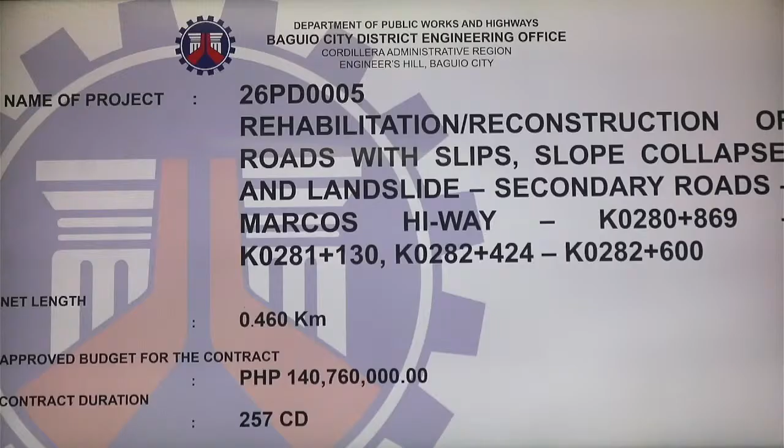Good morning, everyone. I am Engineer Jerome Murph from DPWH BCDEO, and I will be presenting the project 26PD0005, Rehabilitation, Reconstruction of Roads with Slips, Slope Collapse, and Landslide, Secondary Roads, Marcos Highway, from K0280+869 to K0281+130 as Site 1, and Site 2 will be K0282+424 to K0282+600. Net length of the project will be 460 meters or 0.460 kilometers. Contract duration will be 257 calendar days.

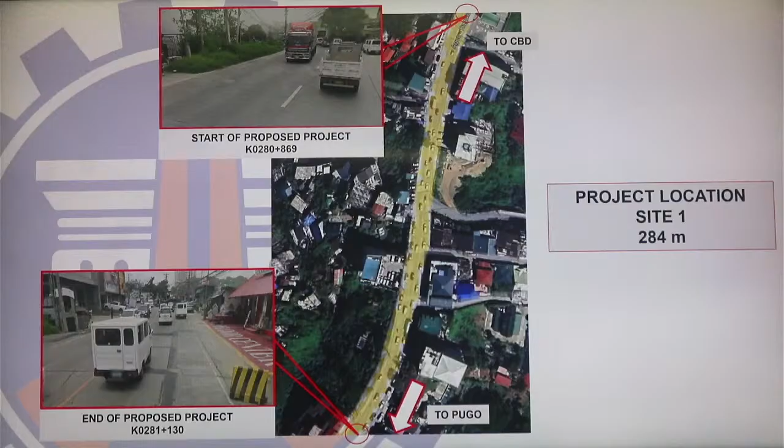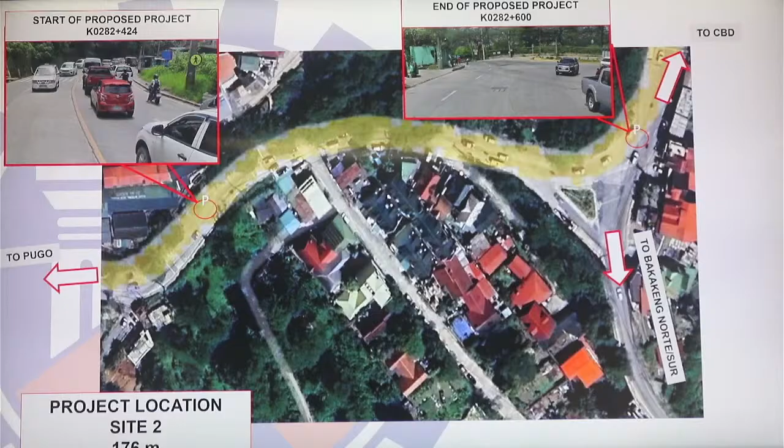Next slide, I will be presenting the proposed site location 1, which has a net length of 284 meters from Peak Blossom to floor center. And site 2, having a net length of 176 meters from Teachers Justice Village to the entrance of Bakakeng Norte Sur. Summary of quantities for CW1, construction of slope protection, and CW2, road construction.

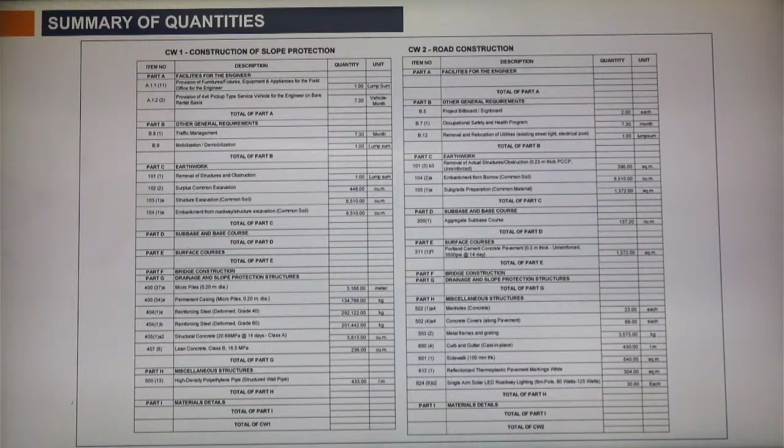Straight line diagram of site 1, that has a proposed 1 meter HDPE pipe, 300 millimeter thick PCC pavement, 6 meter retaining wall, 8 meter retaining wall, 14 meter counterfort retaining wall with micropiles, 100 millimeter thick sidewalk, curb and gutter cast in place, pavement marking, center line and edge line, manhole cover with inlets, and solar street lights.

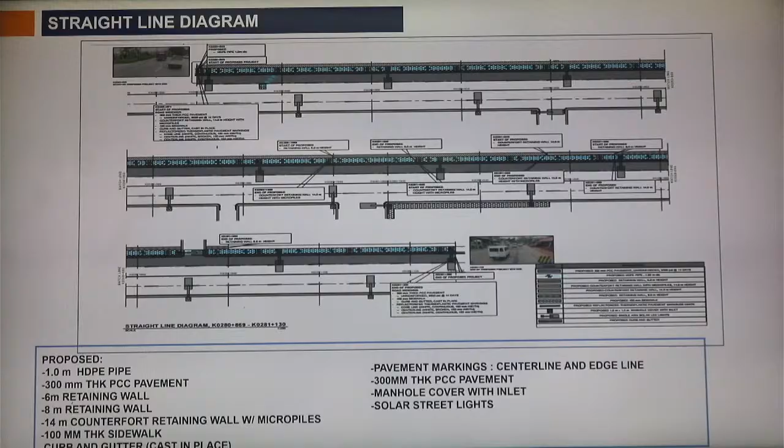Straight line diagram of the proposed site location 2. We will be having a 1 meter HDPE pipe, 300 millimeter thick PCC pavement, 8 meter retaining wall, 100 millimeter thick sidewalk, curb and gutter cast in place, pavement marking, center line and edge line, manhole cover with inlets, and solar street lights.

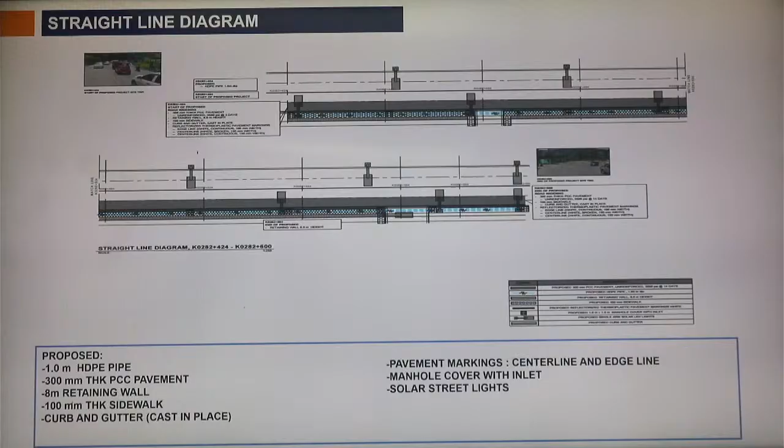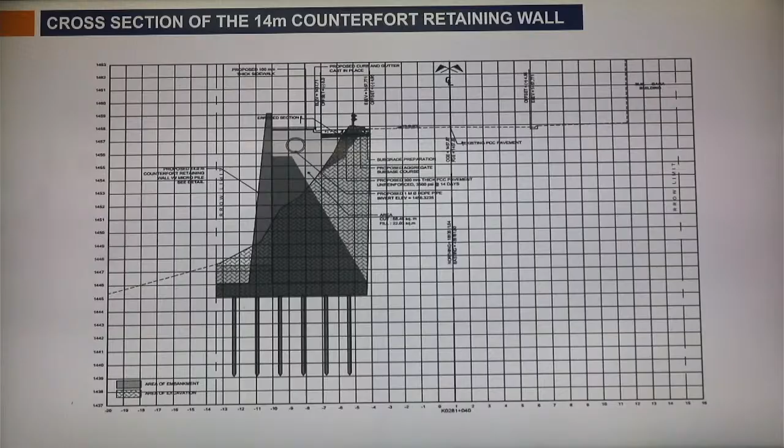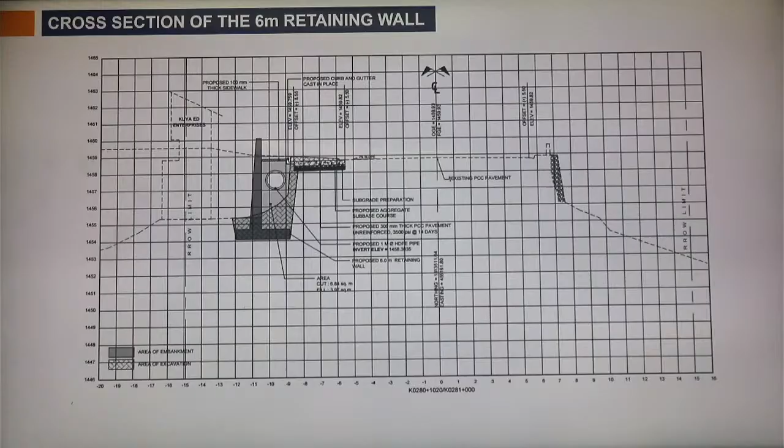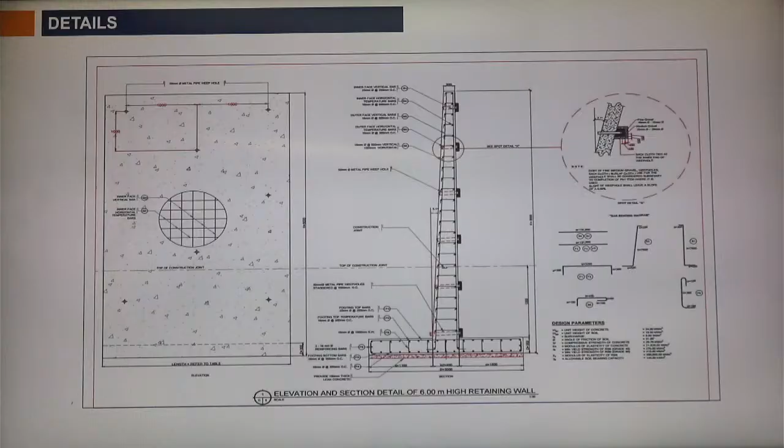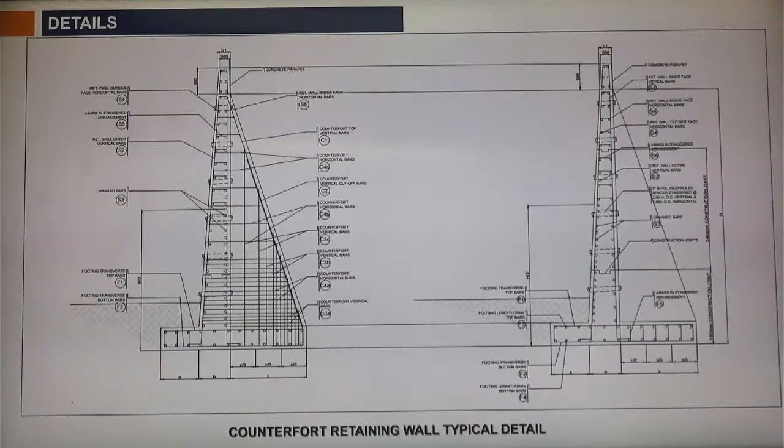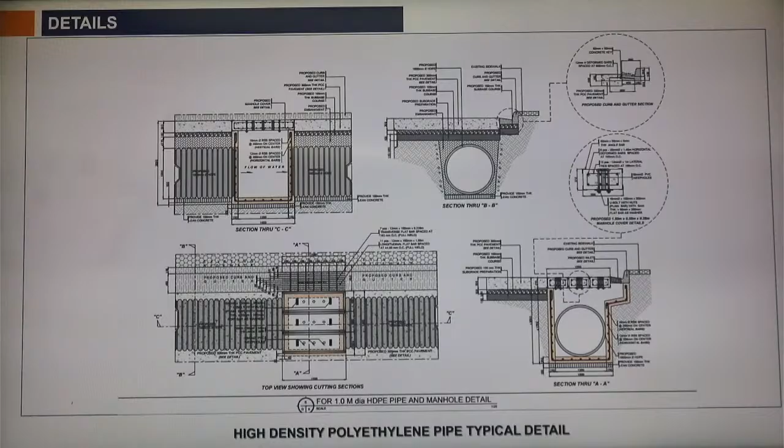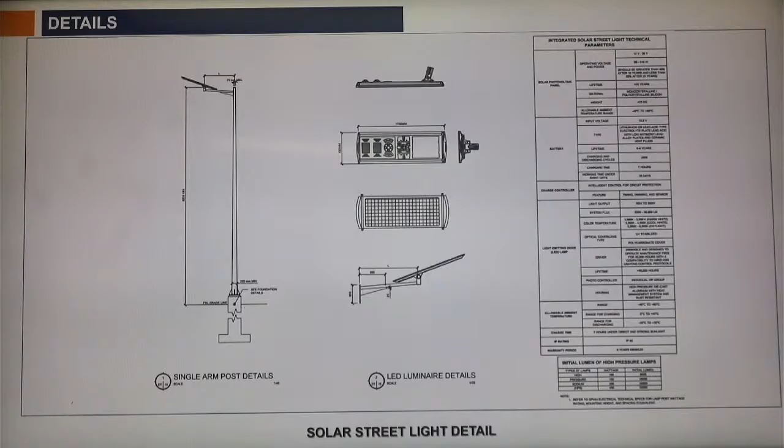The next slide is the high density polyethylene pipe typical detail with inlet and manholes. The next slide is the typical solar street light detail. It's still being verified what's correct. And the next slide is the coordination with the barangays affected by the project. And that is the end of our presentation for today.

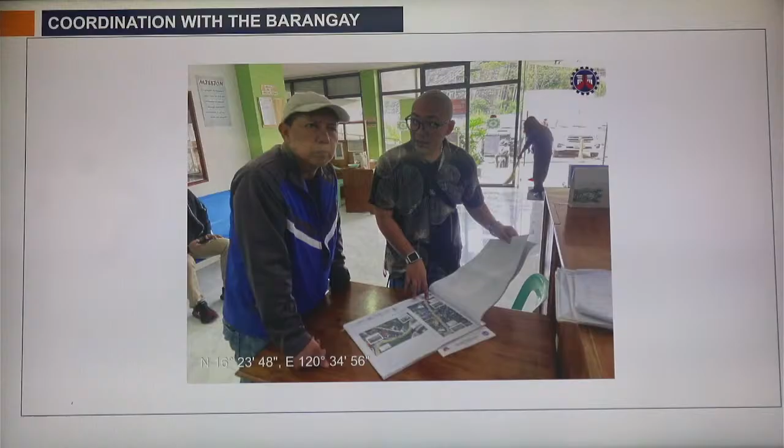For clarification, the approved budget for the contract is 135,833,400. There was just a mistake in the PowerPoint presentation, so what I read earlier is correct. So, Sir Norman, Sir Wally, any additional inputs regarding the bid data sheet and the ITB?

We'd like to remind the prospective bidders, for BDS 5.1, the minimum required PCAB license for this contract: size range medium A, license category B, largest single project at least 67,916,700 pesos, allowable range of contract costs up to 150 million.